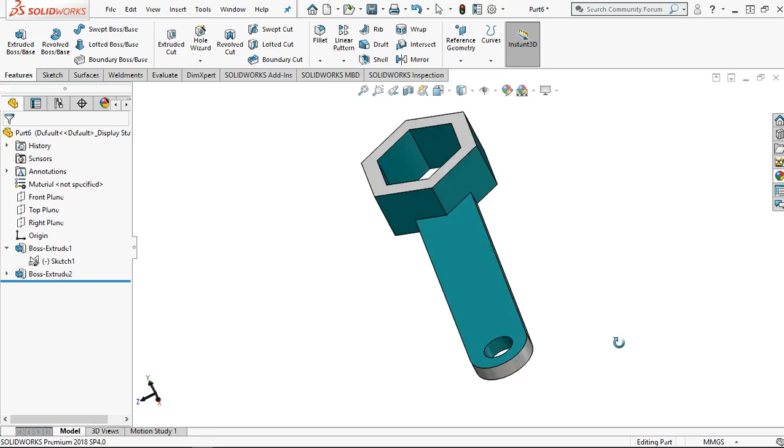In this video, I will show you how to make this exercise, a box spanner. This is the dimension for this part. Let's make the modeling part now.

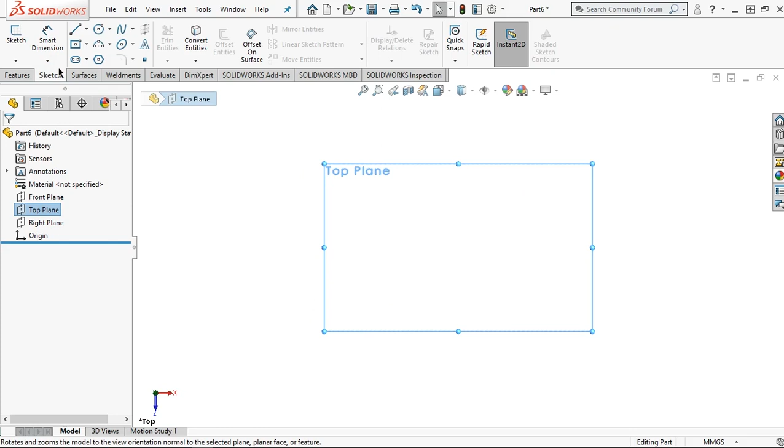From the SolidWorks interface, let's start modeling from the top plane and click on the normal tool. Go to the sketch and click for polygon, starting from this point.

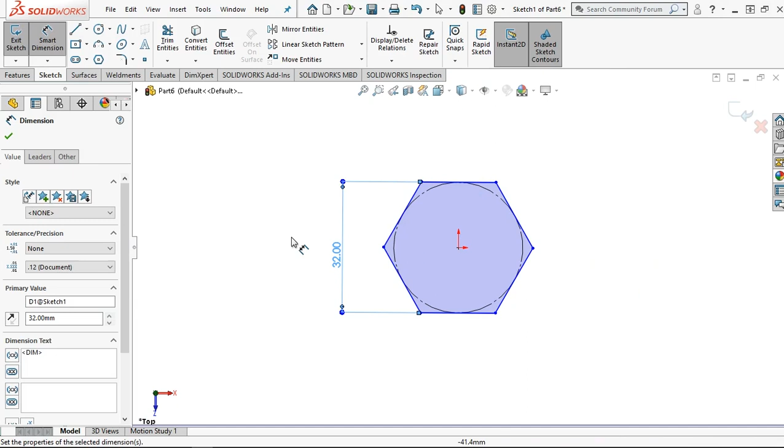Then click smart dimension. Set this distance for this line to 32 mm. Click OK. For the next step, click this line and make it horizontal.

Let's make offset entities. Set the value to 6 mm. Then OK.

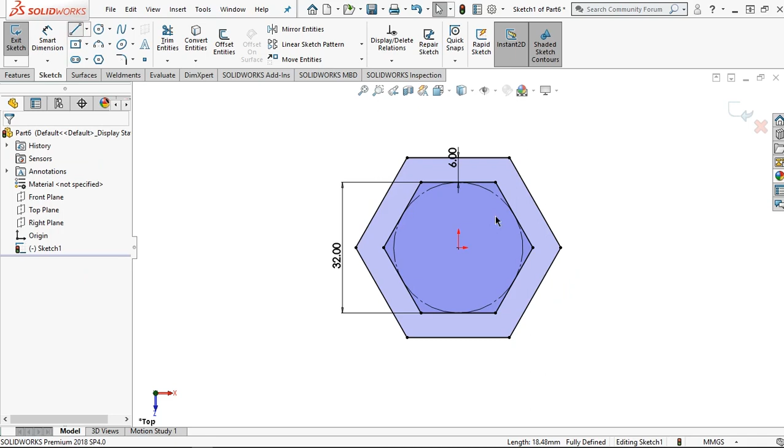For the next step, click this line. Let's zoom out. Start from anywhere but on the sides. Make it horizontal. Right click and click select.

Set the distance for this line to the center. It is 125 mm.

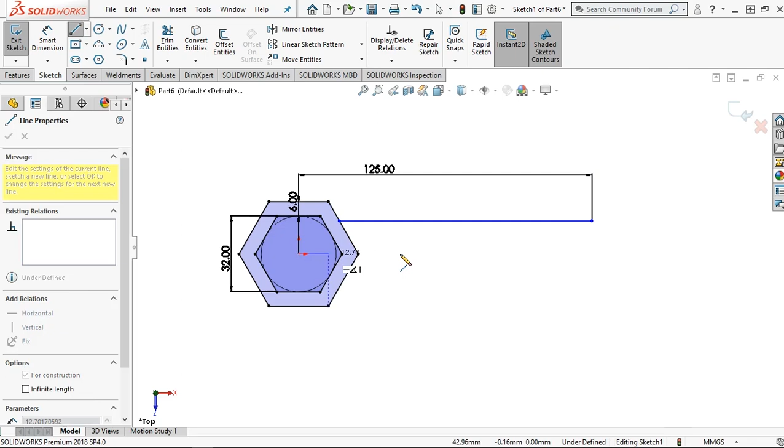Then click OK. Click this line, and I want to make the guideline, make it for construction. Right click and click select.

Make it 12 mm for this diameter value.

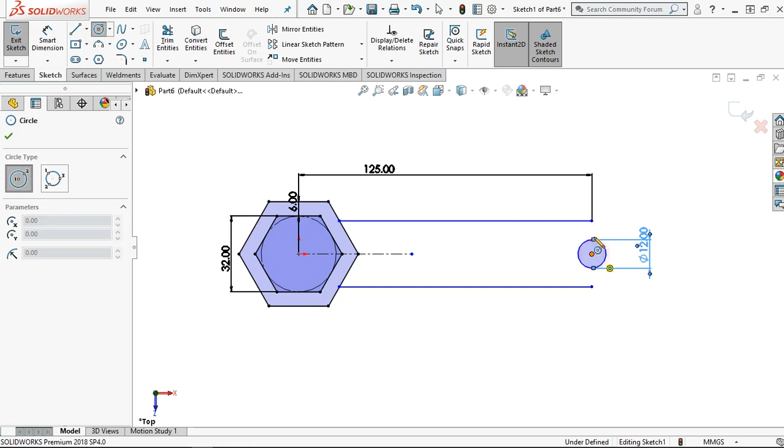Make sure this distance for this line is 24 mm. Then OK.

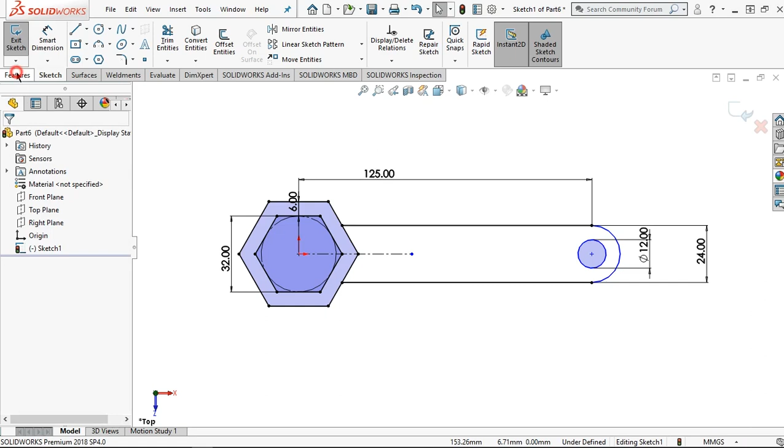Click OK. For the next step, let's give the thickness by clicking extrude boss. For this sketch side, I want to make it 6 mm for this thickness. Then OK.

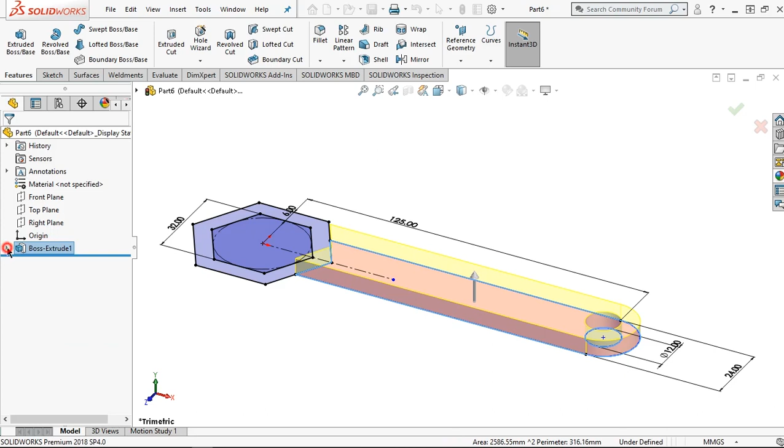Let's make a double extrude boss by clicking this toggle, then click the sketch and click extrude boss. Then select the sketch and set the value to 20 mm.

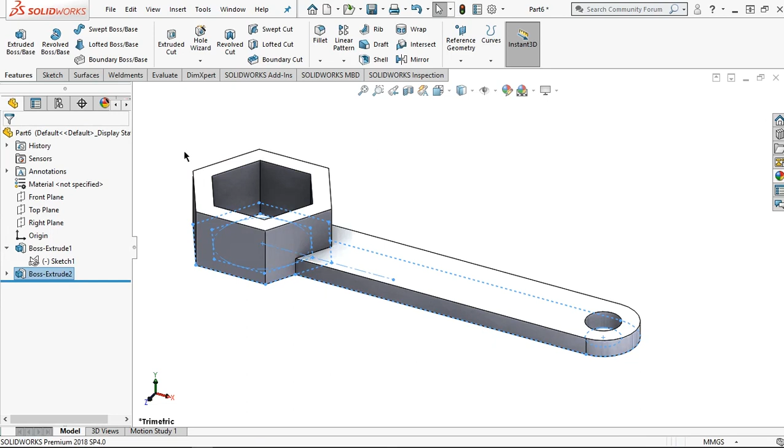Ctrl 7 to make it the isometric view. Last, you can change the appearance by clicking this edit appearance.

For example, I want to change to this color and click OK.

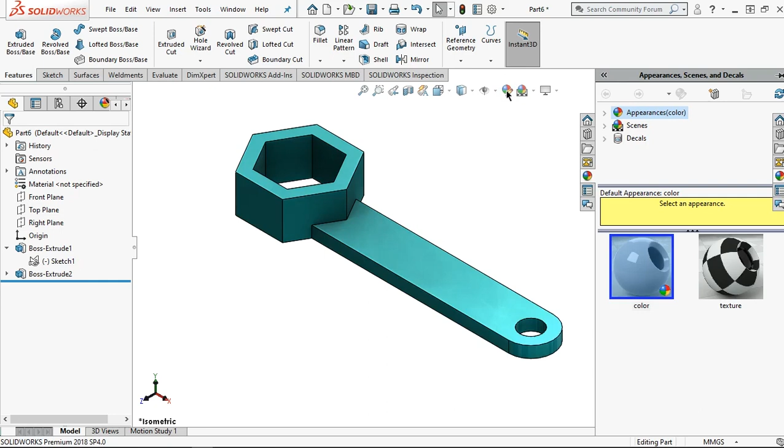Let's make the other color by clicking this edit appearance, then delete this section, then click this select face, then select this surface.

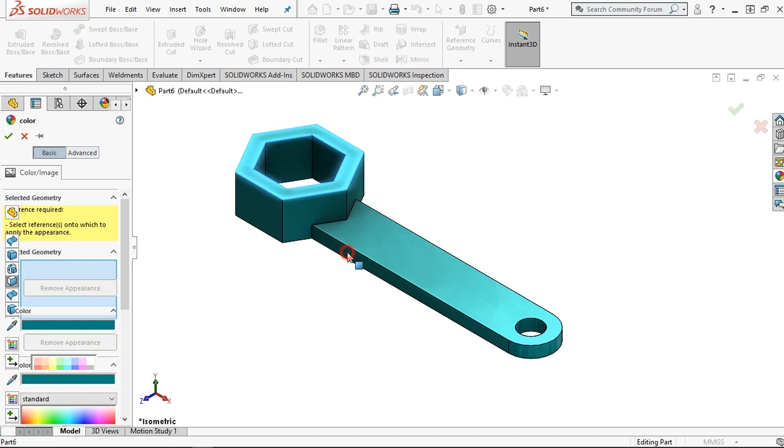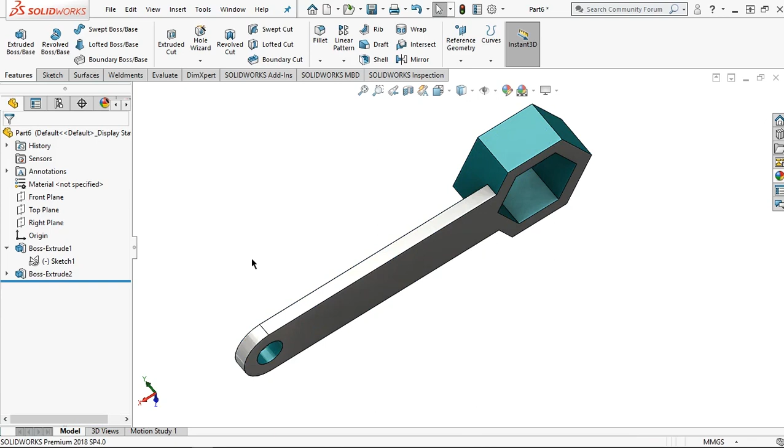Change to isometric view by the combination keyboard Ctrl 7. Well, this part is done.